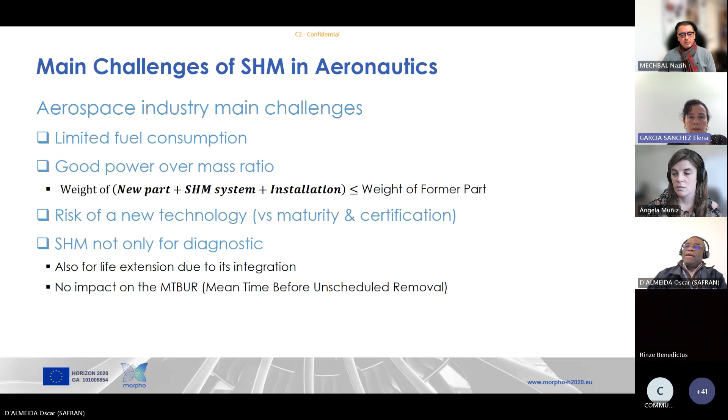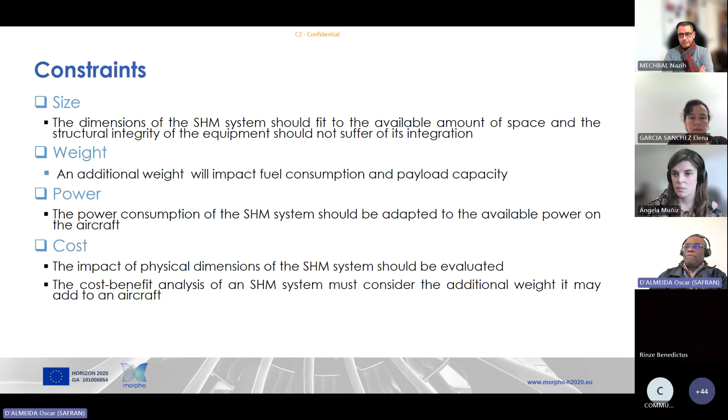The constraints, if you look at the detail, will be the size: the dimension of the system should fit the available space or volume, because we don't have a lot of volume and space on these structures. Any additional weight will impact the fuel consumption, so the payload is a very big issue. You also have to care about the power consumption, and you have to minimize the system consumption. And of course, the cost: the final criteria is the impact on physical dimension, and it should be evaluated, and the cost-benefit analysis has to be done, considering the additional weight or the additional services.

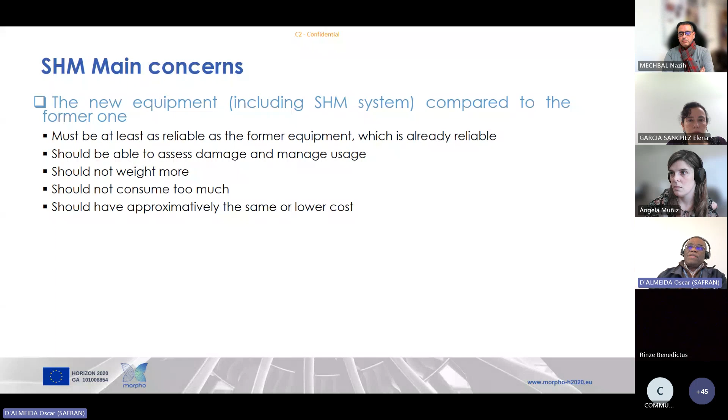The main concern is the new equipment compared to the former one. It has to be at least as reliable as the former equipment, even with added system. You should be able to assess damage and manage the usage. The weight should not be more, and the consumption should not increase. And approximately the same or even lower cost, which is what we call SWaP-C: size, weight, and power reduction, and also the cost concern.

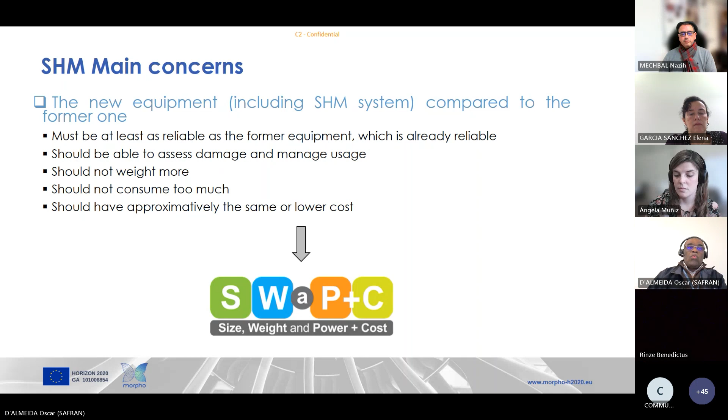Once we have seen that, it means that we have to think about a new paradigm. What is this new paradigm about? As I said, the SHM will not be only about health monitoring. It should be also for health management, meaning that you have to take into account the damage, the fatigue, the load assessment. This damage benefit has to come from new technologies, additive manufacturing, surface functionalization, which is something we are doing in MORPHO, like embedding SHM and sensor network.

The collaborative network coming from the industrial Internet of Things, even augmented reality for HMI, human-machine interfaces, a need for collaboration between them, and artificial intelligence and model-based data analysis and prognostics. And this moves to damage awareness, the remaining useful life with prognostics, and even more damage-tolerant equipment.

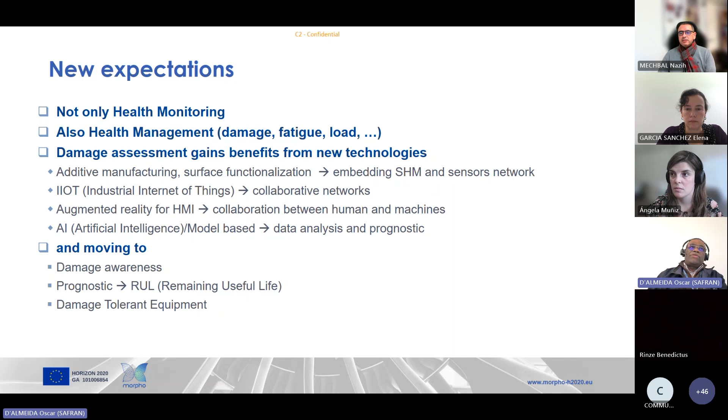So you have to go for a global system approach, because if you look at each OEM, they may have individual or several SHM systems. The aircraft may have its own SHM system, meaning for the airline that you have multiple SHM systems. How can you manage that? Because you have the concern about interoperability, a global system optimization concern, the size, weight, power, cost, and the decision to make.

And last but not least, the data and the ownership of the data, because we all know that data is the heart of the business, will be the heart of the business, and for the services and the responsibility of owning this data. So there is a need for a global system approach. There is a very high interest of collaborative work within stakeholders.

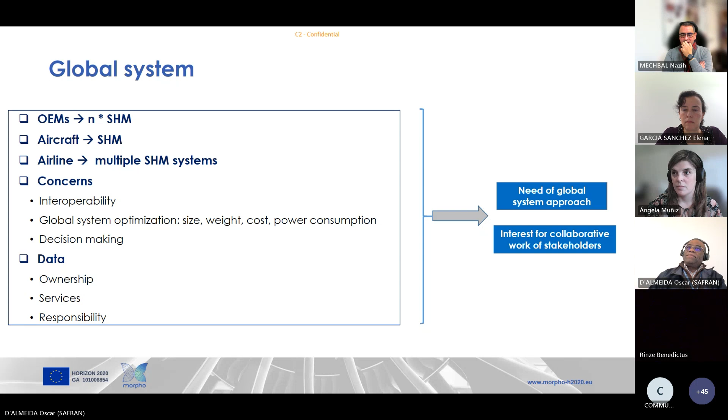What's the interest of a collaborative approach between stakeholders? You can discuss the constraint allocation or how you share this allocation. You may share some needs or components, and how you share the data and useful information. So as OEM, you have to deal with the aircraft manufacturer, with airlines, and maintenance operators. This means that with the maintenance operator, you have to discuss the integration, think about partnering and teaming with airlines, or intimacy alliances with aircraft companies.

So if you look at the history, there is a move from health monitoring to health management. We start, for us, with SHM, like structural health monitoring or management. Then there's system health management, which moved to integrated system health management or integrated vehicle health management. This integrated system or vehicle health management is a capability of the system to assess the current or future states of the system or subsystem health, and how to integrate this in the global picture of the system health within the available resources and operational demand.

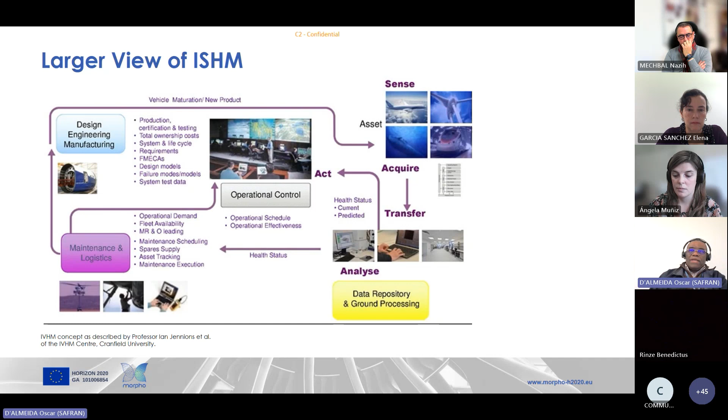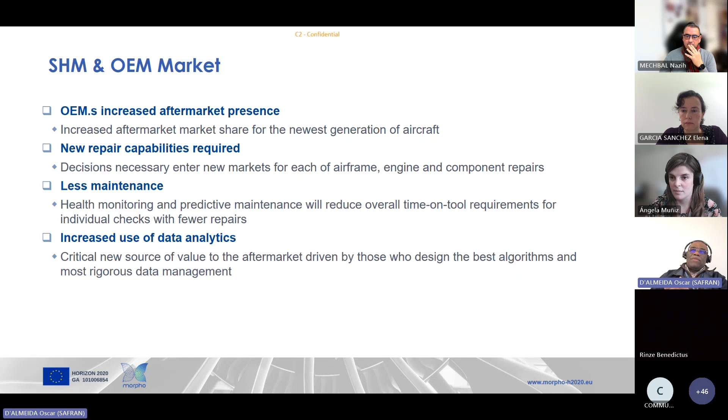How many minutes do I still have? Many. Many, okay. Not many, okay. Yeah.

Continuing on the potential value, you have significant reduction of maintenance cost and increase of aircraft availability.

You have to develop probabilistic SHM data-driven methodologies. That's what is mostly done in our project, and that's the topic addressed in the MORPHO project. So you need methodologies for damage assessment as well as for remaining useful life.

What you qualify is the use of embedded sensors or embedded sensor networks for the assessment of life cycle of the component and system. This will enable a new inspection strategy for this component based on automated SHM technology.

Of course, we have to pay attention to the ecology aspect and recycling, total or partial recovering of the material used. We are working on developing new technology to optimize disassembling and recycling of components after their end of service life.

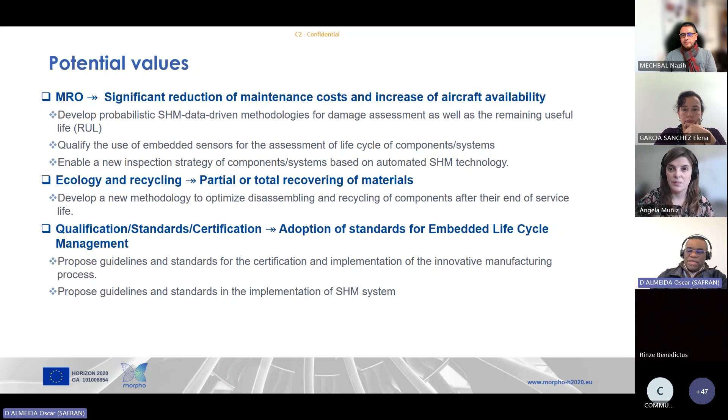So going to the concluding remarks: MRO to support maintenance, moving to support maintenance and services.

But four main topics: ensure and maintain operational excellence for customers, meaning increase the capacity for maintenance forecast and schedule. We really have to improve this aspect.

We need to be more efficient, to have more efficient means for assistance, troubleshooting, inspection, and to provide more efficient maintenance operation, reduction of turnaround time, repair, logistics, etc.

You have to bring maintenance requirements to design level for new equipment and systems. So we need to learn more from experience in operation to include support and maintenance system requirements at the design level.

Third topic: support equipment and system performance in operation in their environment, taking care of airworthiness. This means we have to maintain and increase the same level of performance during the operation life cycle.

Reduce the environmental footprint, which is a very huge concern, especially for maintenance operation - how to handle replacement versus reparation, new processes to develop or settle, and how to recycle parts or components.

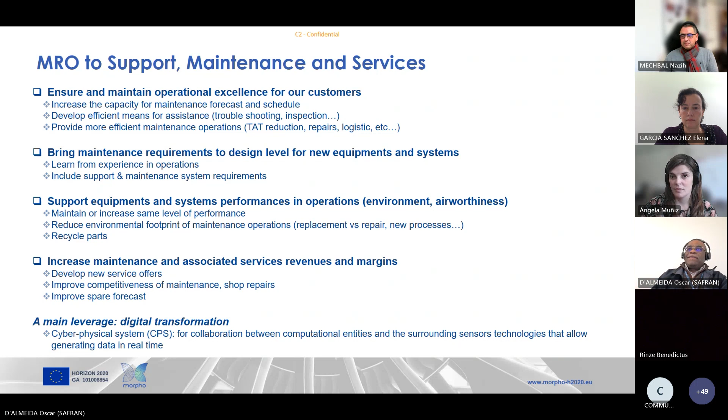Some will call it a digital twin, but you have many different definitions of digital twin, so you have to commit on what is the right definition. So there's still room for innovation.

I'm talking to academics and researchers, most of the audience. Innovative joining technology and damage diagnostic for aircraft equipment and system with high potential to offer substantial benefits - to reduce weight, but keeping faster, leaner integration and repair.

Advanced quality monitoring and online process control will help also, and should be applied to flexible automation of manufacturing, also for maintenance and repair process to achieve better rates.

The manufacturing process for the production of multifunctional and smart parts system - this will cover the whole production chain with a view to support activities such as supervision during operation and during manufacturing.

So the integrated technology and methodologies will bring us to the next generation health management and monitoring, with global sensor development, wireless network, data-driven fault detection, and new MRO and recycling technology for these multifunctional and smart parts - this is really necessary.

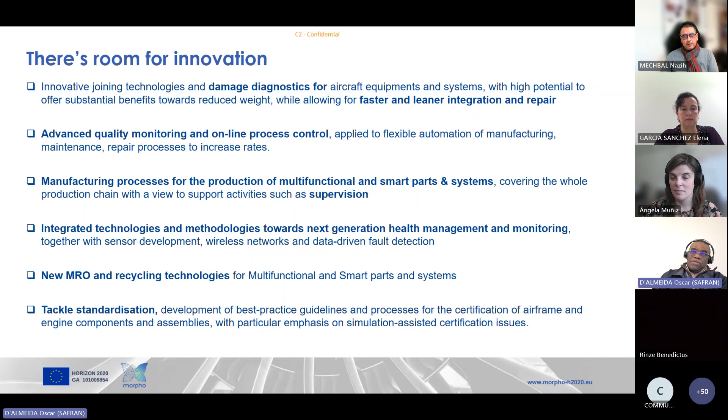So I want to finish and conclude my talk with a document I found lately: what is the evolution of the ISHM concept?

I didn't know that SHM started in 1960 - they started talking about SHM. Then they moved to vehicle health monitoring in the 1970s. Integrated vehicle health management was the 1980s. Integrated system health monitoring, 1990s. Prognostic and health management in the 2000s. And then 2020, there was integrated system health management, and this is now moving to what they call intelligent health and mission management.

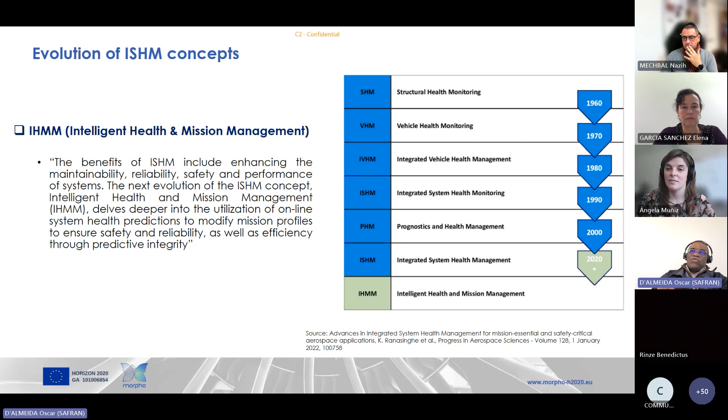What they propose is that while ISHM includes enhancing the maintainability, reliability, safety, and performance of the system, the next evolution - intelligent health and mission management - will delve deeper into the utilization of online system health prediction to modify mission profile, to ensure safety and reliability as well as efficiency through predictive integrity. I want to conclude on that.